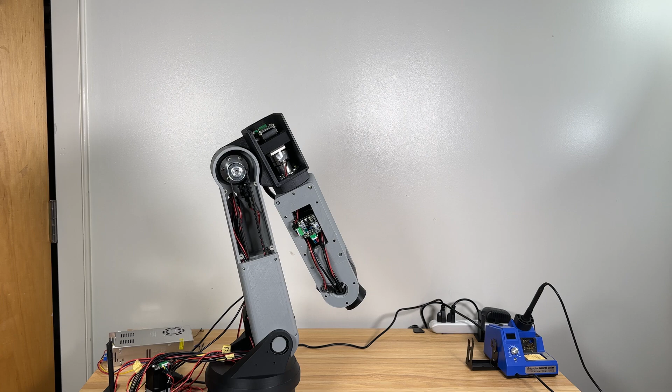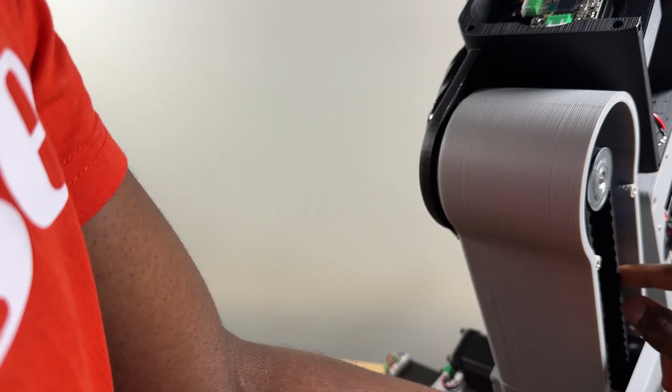In this video, we are going to build a 6 degrees of freedom robot arm from mostly 3D printed parts. We'll be going over the process of building the robot, the challenges we faced, and how we overcame them.

Before we get started, let's outline some of the goals we want to achieve. It should be visually appealing. It should be able to carry at least 500 grams so we can mount like a phone to it or something. It should also cost about $700.

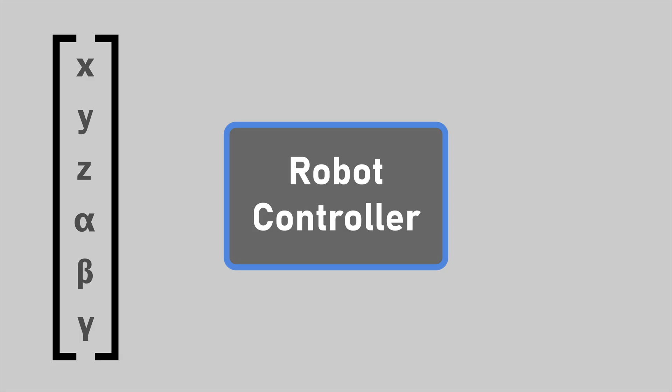To start designing our robot, let's take a moment to understand how the robot's controller works. It takes a point and orientation in Cartesian space as an input, and then it performs some calculations based on this input. After the calculations, it outputs the joint angles the robot needs to reach that point.

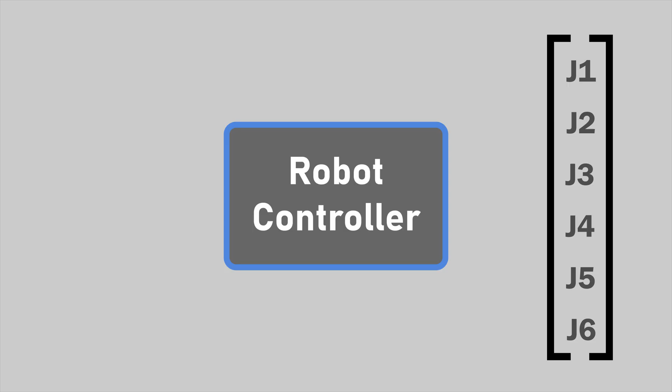But the question is, how are the joint angles calculated? Here's where inverse kinematics come in. There are various methods to solve inverse kinematics, such as numerical, algebraic, and geometric methods. But because of how complex the 6DOF robot is, the algebraic and numerical methods won't be feasible. So we have to use the geometric method.

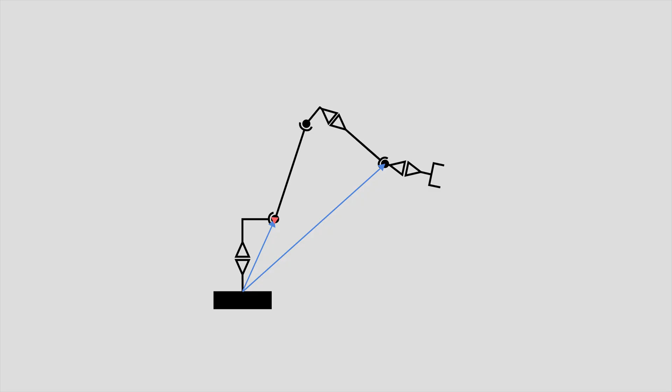Let's take a look at how the geometric method works. We assume the first 3 joint angles determine the position of the end effector, and the last 3 joint angles determine its orientation. Using trigonometry and vectors, we find the first 3 joint angles. Then using those angles, we can find the last 3 joint angles. I have linked an article in the description that goes into detail on how this is done.

Now that we know the angles each joint should move to, the next step is making sure all the motors reach their target angles at the same time.

The AccelStepper library has a class for controlling multiple motors together, but it doesn't support acceleration or deceleration. While this works at low speeds, stepper motors can't jump straight to high speeds without ramping up, so we are going to build our own algorithm to handle acceleration and deceleration smoothly.

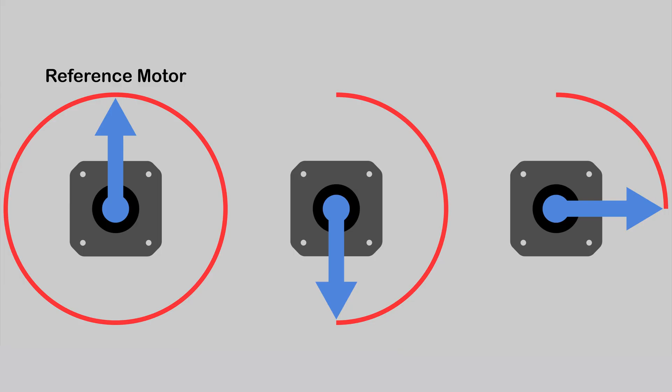Here's how the algorithm works. We start by identifying the stepper motor that needs to rotate the largest angle. This motor becomes our reference, or independent, variable.

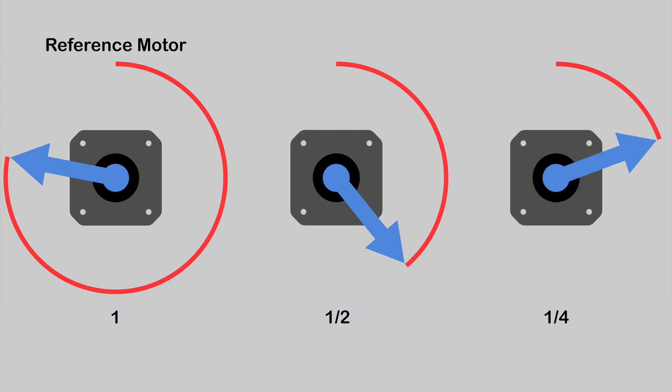Next, we calculate how much each of the other motors need to move in proportion to the reference motor. As the reference motor moves one step, the other motors take steps based on their calculated ratios. This keeps the motors synchronized so that they reach their target positions at the same time.

Motor speed is controlled by adjusting the time delay between each step. A shorter delay means faster movement, while a longer delay slows it down. Using this principle, we can create acceleration and deceleration by gradually changing the time delay. By progressively decreasing the time delay, the motor accelerates, and increasing the delay causes deceleration.

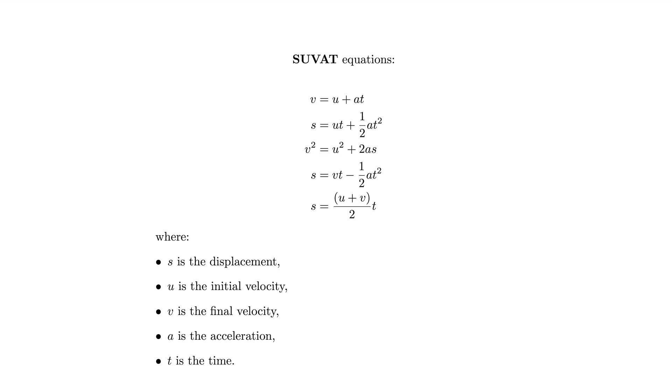To calculate the exact delays needed, we use kinematic equations. These equations allow us to relate the motor's position to time, giving us precise control over speed and acceleration.

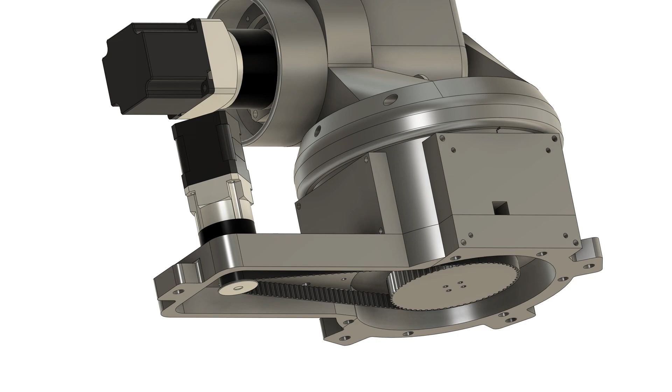Now that the algorithm is sorted, let's talk about the mechanical design. We'll be using 5 NEMA 17 stepper motors and 1 NEMA 23 stepper motor. For joint 1, we are attaching a 50:1 planetary gearbox to a NEMA 17 and then driving the joint with a 3:1 pulley. This gives us a total reduction of 150:1.

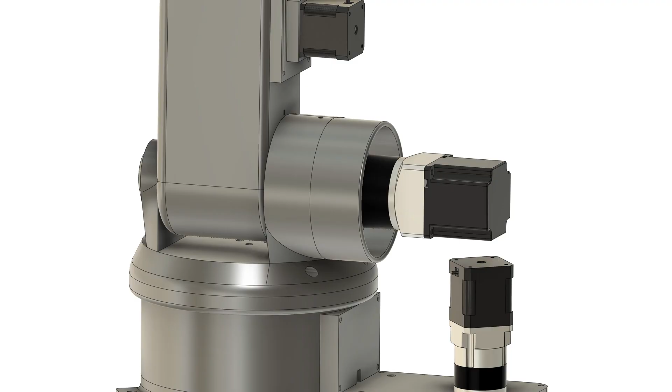Joint 2 requires a lot more torque since it is carrying the whole arm. So we are using a NEMA 23 paired with a 50:1 planetary gearbox to directly drive the joint.

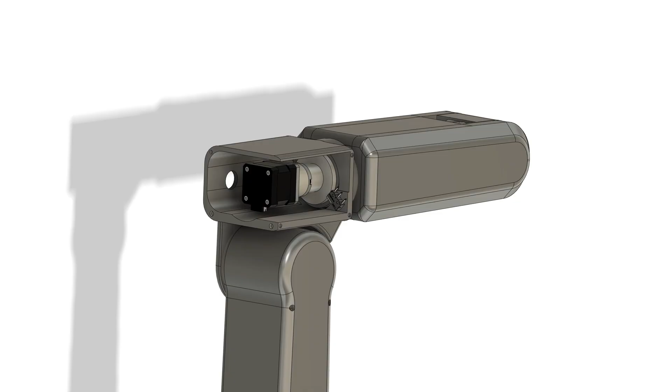For joint 3, we'll mount a NEMA 17 with a 50:1 planetary gearbox and use a pulley with no reduction to drive the joint. For joints 4, 5, and 6, we are using NEMA 17 motors that already came with 5.18:1 planetary gearboxes. Joints 4 and 6 will be driven directly, while joint 5 will use an additional 3:1 pulley, bringing the total reduction to approximately 15:1.

With all the mechanical components in place, the next step is assembly.

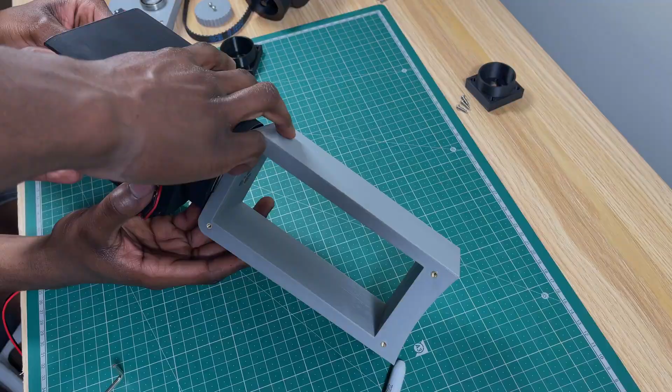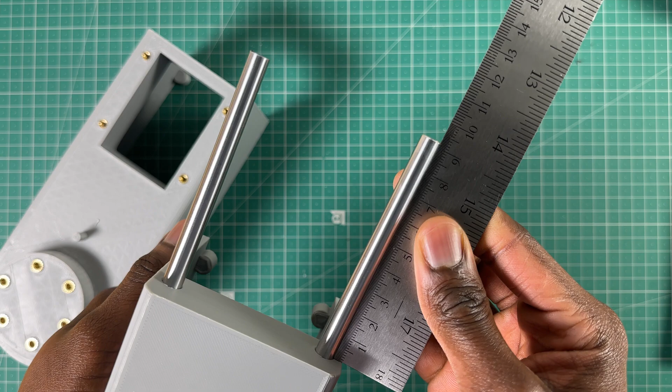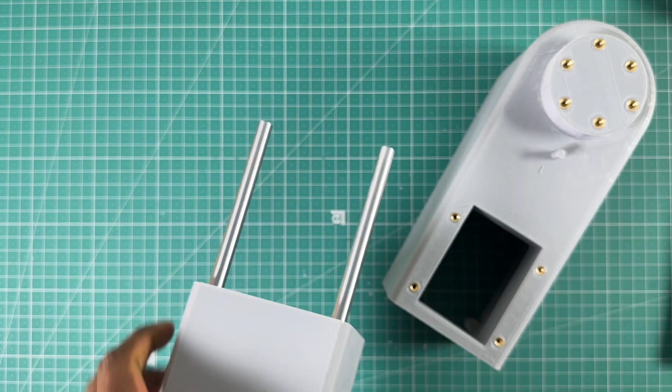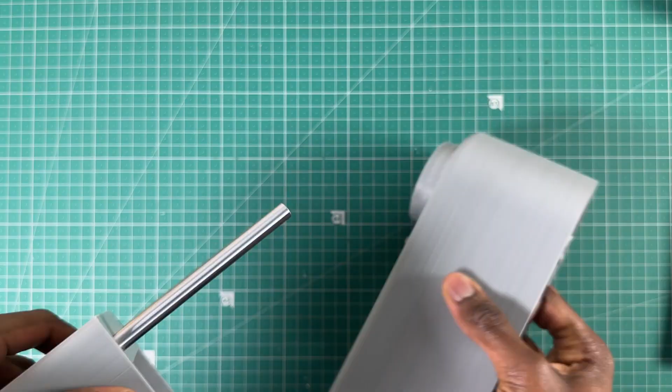We ran into a bit of a problem. The rods didn't fit into the other parts because they were designed to be angled slightly towards each other. This meant the rods needed to be inserted into both parts at the same time. However, we first inserted the rods into one part, and when we tried to add the other, it didn't fit. Since removing the rods was difficult, we had to destroy the parts and print new ones. We've taken out the rods and printed new parts, so we can continue with the build.

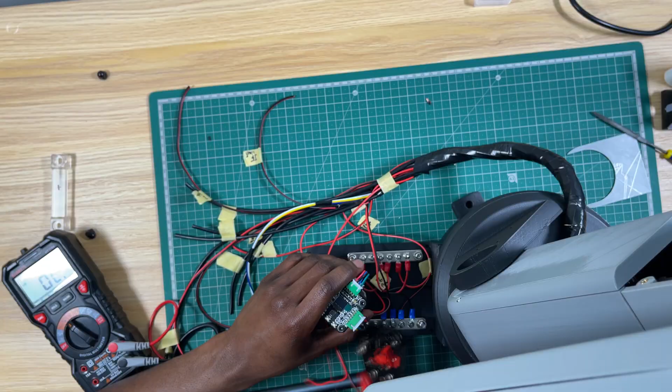Is that your phone? Yeah, that's it.

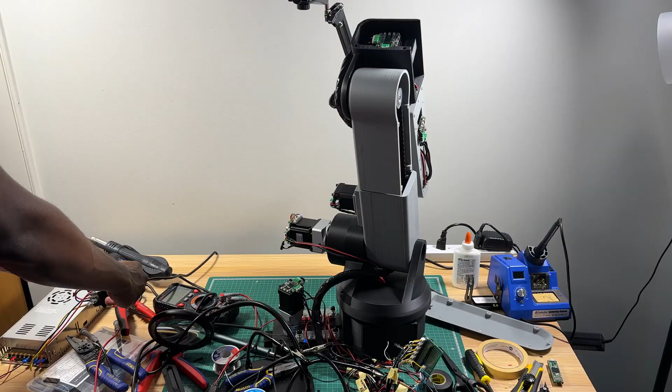That sound you are hearing is the belt on joint 3 slipping, which means it can't handle the weight of the second part of the arm. We are not entirely sure what's causing this, but we suspect the support for joint 3's motor is weak, causing it to bend when we try to tension the belt.

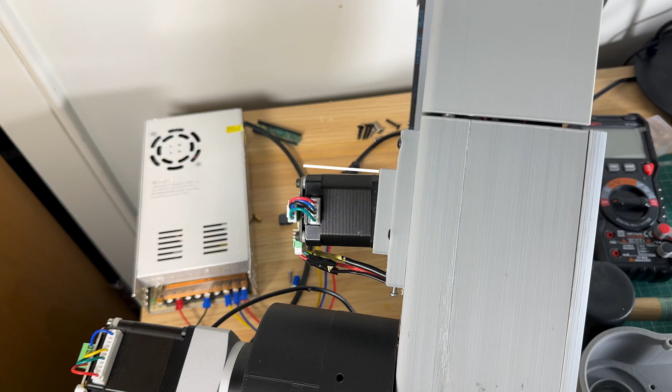To fix this, we'll redesign the arm with stronger supports. But before disassembling the robot, we'll home the other joints to ensure they are working properly.

Unfortunately, we couldn't home joint 2 because unplugging the microcontroller caused erratic movement, which ended up breaking the limit switch.

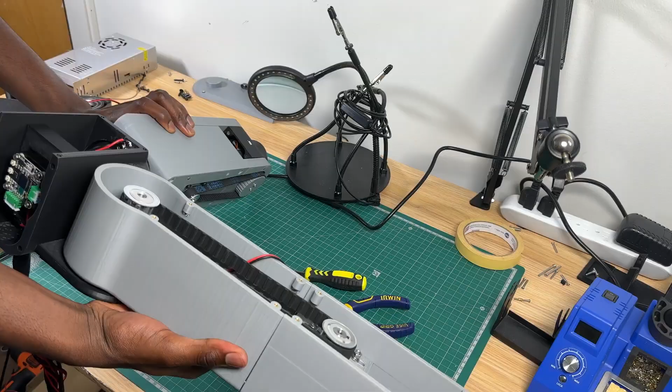In addition to reinforcing the supports, we've decided to replace the NEMA 17 stepper motor with a NEMA 23. This ensures the motor strength won't be an issue anymore.

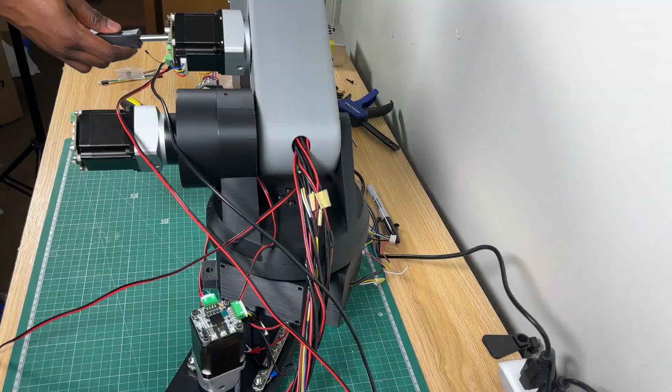Now that all the changes have been made, we can retest joint 3.

Even after tensioning the belt again, the belt tension still wasn't strong enough, and so it started slipping again. We are going to have to take the robot apart and adjust the tension one more time.

Is it the motor that's doing that or what?

While the belt tension isn't as strong as we would like it to be, it's good enough for now. We can finally move on to testing the inverse kinematics code.

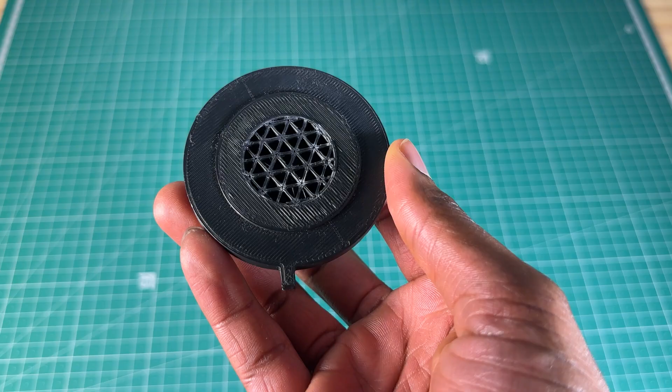As you can see, there's still a lot of work to do. The shaft holding the second part of the arm failed because of the tension in the belt. Tensioning the belt has been a real challenge, so we've decided we are going to mount the motor directly to the joint. This change will also help reduce backlash and minimize jitter during movement.

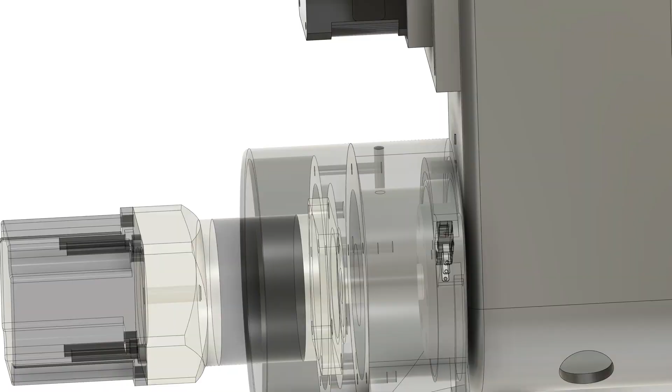Another improvement we'll make is fixing the limit switch placement for joint 2. Right now, it's too fragile and breaks easily. We are considering switching to a proximity sensor instead, as it doesn't require direct contact, so it will be more reliable.